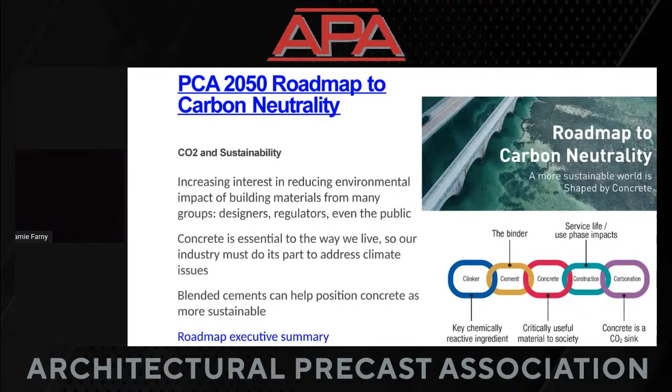We need to move people around. We need to move goods. We need to have protection on our waterfronts. So what can we do within that context of providing this really valuable material to address climate issues? We know blended cements are one way that we can help make concrete more sustainable. So in this roadmap, we looked at clinker, cement, concrete, construction, and carbonation.

We looked at the things that are really critical in terms of that whole manufacturing process, and we called it the 5 Cs. And we said, every one of them kind of has an area where we might be able to pull carbon out. So we broke it up and we were very methodical about looking at everything. And I want to focus on just a couple of them.

And optimizing cement was something that our manufacturers identified as a real key area where we can have a significant impact. So clinker is what we manufacture from these materials that we mine out of the ground, and then we grind that up into the powder that is Portland cement. So what is the appropriate clinker to cement ratio? How much clinker do we really need for cement to be able to do its job?

So we're looking at modified formulations. And one of those we're focusing on quite heavily today is making sure that people understand and at least allow as an alternative Portland limestone cements or PLCs. That's a big focus. It's just building awareness, educating people about its performance and its benefits. We know that there's other cements that will come online over the next really 3 decades, things that we maybe don't even know right now.

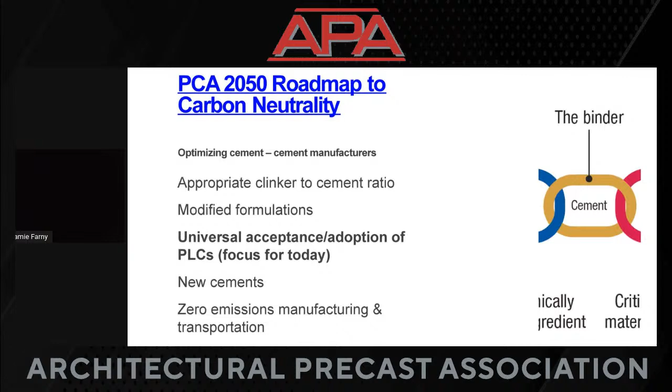And we're also looking at, well, how do we move those materials around? In manufacturing and in transportation, there's opportunities to have fewer emissions. So a big part of it is the focus on cement. But again, as part of this 5 Cs value chain that we speak about, we also recognize we can optimize concrete. Concrete producers have a role. We don't build with cement, we build with concrete. So what can those people in that part of the industry do? They can optimize mix designs, improve mix designs.

We can increase our use of SCMs, supplementary cementitious materials like slag and fly ash and silica fume and other additives. These are often byproducts of another industry. Sometimes they end up in landfills or as waste, but we know they can be beneficially reused in concrete. And in the US, at least, they aren't always given the same environmental footprint that other materials are, so they can help bring down the carbon footprint of concrete.

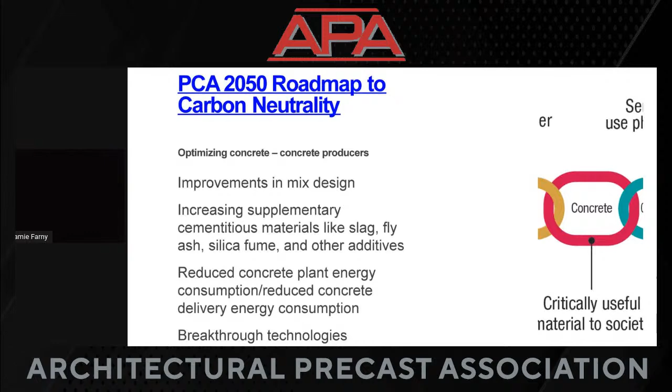We can reduce the energy consumption in our concrete plants and the way that we deliver those materials. There's, again, opportunities to pull carbon out. And we, again, recognize we probably don't even know all the things that are going to come online in the next 30 years. We just know that people will improve processes. People will come up with better, more innovative ideas. We know that right now, though, PLC is one option to lower the carbon content of our binder.

And it is, again, acknowledging the CO2 footprint of construction. We're aware of it. Is it a problem or is it an opportunity? Because when you have a lot of carbon, you maybe have the most knowledge on how to deal with that. PLC is a proven technology. You heard in the introduction, Joe has been part of the task group and the different subcommittees and committees at PCA that have been working on bringing PLC into the standards appropriately. So we know that PLC can help make concrete and masonry products more sustainable. This may appear to be happening very quickly, but the work behind it and the research goes back decades.

So what is PLC? What is Portland limestone cement? We like to say it is a greener cement option. It is a blended cement, and it has additional limestone content in that cement. And then that overall cement is optimized for performance. So right now, at least, it is the easiest way to reduce the carbon footprint of products that are cement-based by up to 10% over the more traditional Portland cement mixtures that you probably are familiar working with.

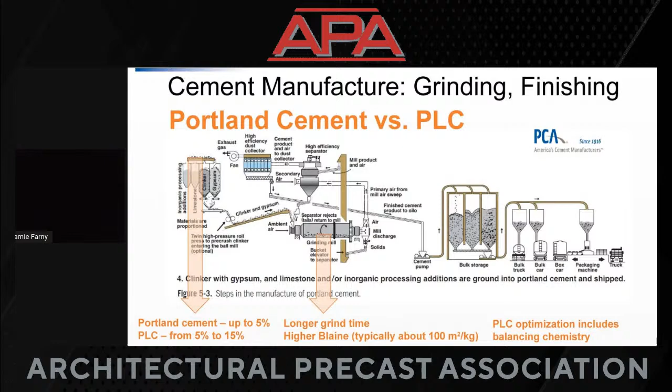So that's one of the ways that we are modifying the cement itself after we add in a little bit more limestone, but we also do some other optimization that includes balancing the chemistry. So we do things a little bit differently at sort of almost the end stage of manufacturing of these cements to make sure that they're going to perform very similarly to that type 1 or 1-2 Portland cement that is the most common material used for concrete right now.

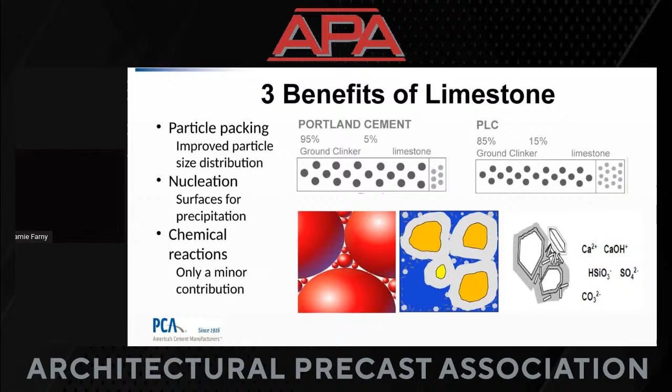So you might have some small chemical reactions, just a minor contribution, but remember there are charges on these particles. So we do see a slight improvement in the chemical reactivity of Portland limestone when we grind it so finely.

So again, the industry has been involved in this activity as a cement manufacturer for decades. We have done a lot of standards work. I said it may feel like this material is all of a sudden kind of appearing out of nowhere. Where's Portland limestone cement coming from? You know, I hear a lot about that now. Well, really, we've been working in the standards to make sure that all the technical information was in place to be able to introduce it.

So we've got that C150 Portland cement standard that's been around for a very long time. It allows up to 5% limestone for almost 20 years here in the US now. Type 1 or a type 1-2 is going to be the most common. So what we're talking about is a material that can perform a lot like that, but it comes under a different standard, the C595 blended cement standard, also from ASTM. It shows you that 5 to 15% limestone limit. So that's spelled out in the standard. Any material that we're manufacturing that's called a PLC or a type 1L has to have in between that range of limestone.

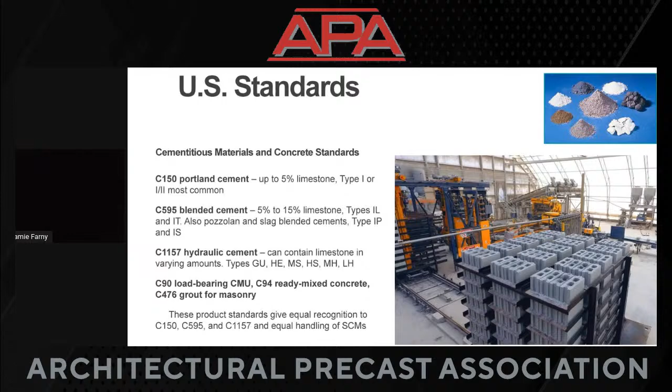Those are the cement standards that are then recognized by the concrete material standards, like C90 for load-bearing concrete masonry units, or C94 for ready-mix concrete, or C476 for grout for masonry. All of those standards recognize any of those 3 cement standards, and they say, hey, we can use all of these materials more or less equally, and we can still use our supplementary cementing materials, or SCMs, along with them. So I've touched on the idea that these are not new materials. They've been around for a while. There's actually a really long track record for limestone containing cements.

Within the US, we have a little bit less familiarity with them until really a decade ago, but there's a very good history of performance, and we're even talking at above that 15% limestone content that we limit it to by our standards in the US right now. Europe has had these kind of materials since the late 1960s. So we're talking about more than 50 years ago.

Canada has been using them since the late 2000s. So they were just a little bit ahead of us in terms of accepting or adopting these kind of materials. But our standards, as I mentioned, have been in place since 2012. And then there were a few manufacturers who already saw the benefits of this kind of movement back in the early 2000s. So under that C1157 standard, that performance cement, they had to demonstrate that it actually achieved strength, and it set, final set and initial set, the same kind of way that we expect the Portland cement to behave.

They already started manufacturing these cements under this other standard. Again, it wasn't widely embraced, but they were out there. We have already then more than 15 years of experience with these kind of cements in the US. What we also know is that our market share for blended cements will grow. We've seen this in other countries as people get familiar using them. And then just a few years ago, we were tracking under 2 million metric tons of Portland blended cements. We're already seeing over 4 million metric tons last year, and we've seen a dramatic increase this year.

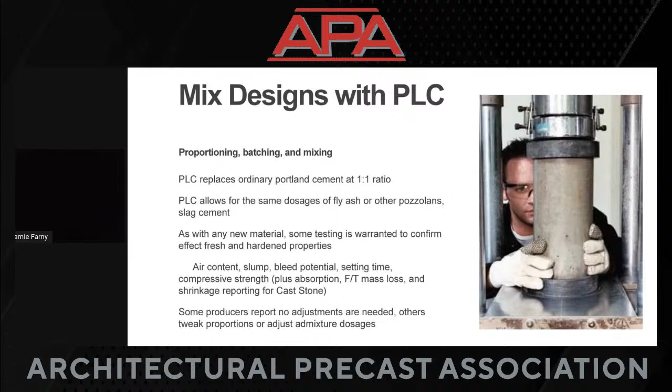And what we hear from many parts of the industry, remember this information that you're seeing today is largely focused at ready mix, but what we're hearing is that some producers report that they really don't make any adjustment once they do that 1-to-1 swap. Others are saying, I may have to bump up my admixture dosage or bump it down. I'm seeing just a little bit of difference in what I get out of my concrete mixes. So I know how to control with admixture technology.

So if we look at the typical effects on the fresh and hardened concrete properties when we put PLC in instead of Portland cement, we look at the fresh properties like workability, bleeding, setting time, heat of hydration. If you're doing very massive things, that can be a consideration. We look at the hardened properties like compressive strength and our scaling or freeze-thaw resistance and our sulfate resistance. So in every case, we can see maybe a slight increase or a slight decrease, but not a big impact on any of these. And the reason, again, is we're talking about very similar cement chemistry. These cements set and harden the same way that a Portland cement does. They are largely Portland cement based.

That little bit of extra fine limestone, and because it's a finer ground cement overall, it may have some slight impacts. Maybe it's going to decrease your overall bleeding. It may delay it, it may decrease it, because again, the mix is very tightly bound with that particle packing going on. The water can't work its way to the surface. You might see a little decrease as your materials get finer, but at the 15% limit that we're talking about, the setting time, that slight decrease that you might see, either initial or final, it's really manageable. And if it is somehow a concern, again, you can turn to tweaking your admixtures a little bit.

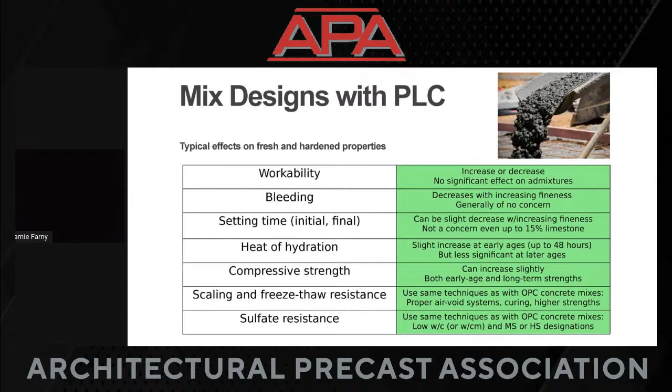But the message for all of those durability issues is that whatever you're doing for your ordinary Portland cement mixes, whether it's a proper air void system through admixtures or good curing or turning to higher strength or using an SCM as part of your mix, whatever you do for your ordinary Portland cement mixes, you do the same thing. You take the same approach with the PLC, and then you test and you confirm, is it a good performance?

So I just talked about sulfate resistance a little bit. You may have, depending on your cement supplier, an option to specify a special type of cement. For instance, for sulfate resistance, we can append an MS or an HS designation to our type 1L. So where we have a type 1, we just put in a type 1L. If we have a moderate sulfate resistance type 2 material that we typically use, talk to your cement supplier. They may supply a type 1L MS.

This material would be tested to demonstrate that it can resist sulfate expansion under exposure to sulfates, and it has to be tested in order to receive this MS designation. Similarly, if you use a type 5, you might have a high sulfate resistant type 1L available to you. In August of last year, the C595 standard was changed to allow producers to produce a type 1L HE, or high early strength material. And this is comparable to type 3 high early strength Portland cement.

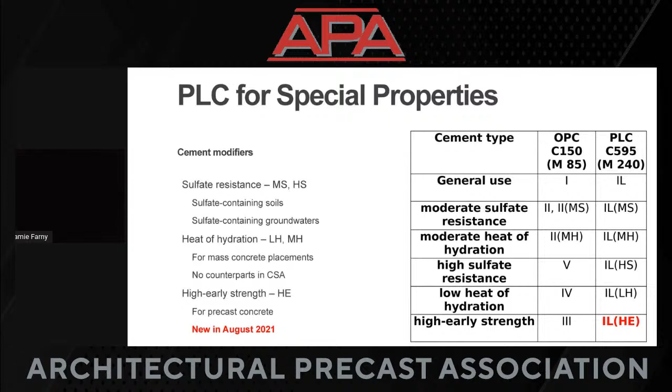So the idea is always talk to your supplier. If you have an option to specify a special property that you require for your particular products, you may be able to get it from your supplier. If those special characteristics are not manufactured by that supplier that you use and another one isn't available, you can use admixtures to achieve those kinds of performances as needed.

So let's talk about, again, this is designed to be drop-in ready. This is a technology, a one-to-one replacement, swap it out, you're good to go. You have the same operations for placing, for finishing, for curing. Now with curing, I will mention, as you see that fineness increase, because these are finely ground cements, you might see a little bit less bleed water. Maybe you can get on your slab sooner. You might see a little bit of a reduction in setting times, because again, that strength is kicking off pretty quick. You might see a little higher water demand.

This is pointing back to that importance of knowing your materials and your mix designs and testing, understanding them. The message here, though, is it's virtually the same handling and performance as ordinary Portland cement concrete. It's designed to be that way. You have the technology that you use with OPC mixes. You can turn to that same kind of approach for a PLC mix.

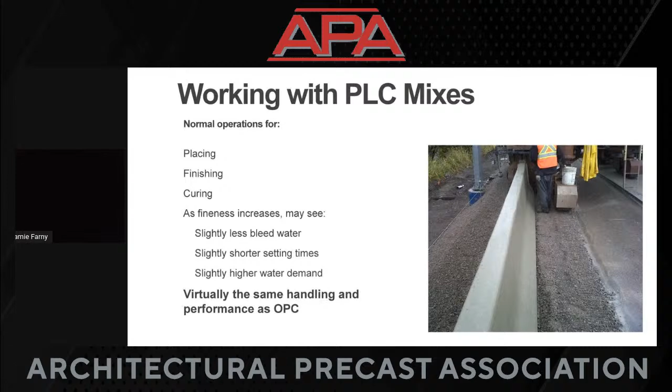And that picture I'm showing at the right is a zero slump barrier wall made with PLC. It's up in Canada. It's been performing really well. So again, we can take these from normal workability kind of mixes down to the very low workability mixes and stiff and extruded, and they can still perform well.

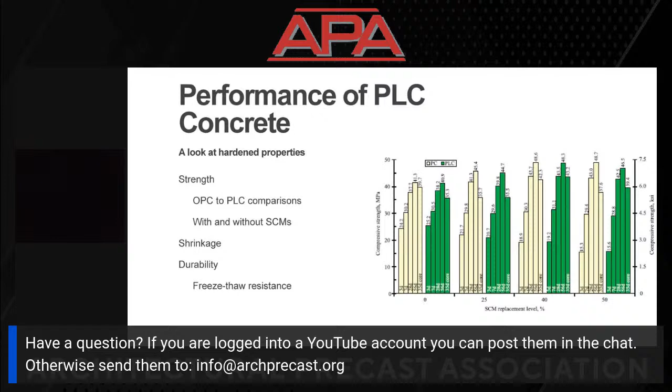We can talk about the performance of PLC concrete, those hardened properties. This figure at the right is a very important figure. It has pairs of graphs that look at the yellow or tan bars versus the green ones, for 0, 25, 40, and 50% SCM replacement levels. So these have no SCMs at the left. These have only 50% PLC or Portland cement with a 50% SCM blend in them.

And we look at the strength from 3 to 7 to 28, 56, all the way out to, we even take a core at a year. And you can see within each set of graphs that the green and the yellow or tan are almost identical overlays of each other.

So this is telling us we get the same ultimate strength with a PLC mix. We also get the same strength development with a PLC mix. So we figured out compressive strength. You can do it with or without supplementary cementing materials. If you need those for either a durability aspect or to bring down your carbon footprint because you have fly ash or slag cement that doesn't have the same CO2 footprint as cement, they work well together. That's the bottom line message there.

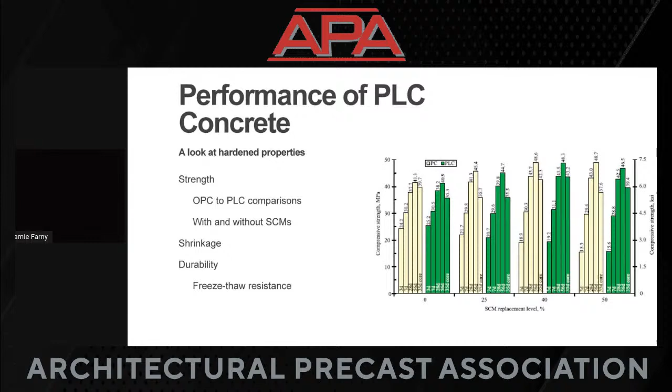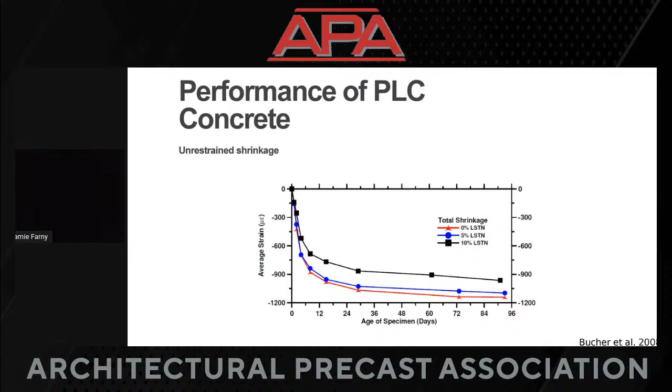So you can see out to this 3 months here that the red or the 0% limestone, so that'd be more like a Portland cement mix, it actually shrinks a little bit more in this particular set of materials than the 10% limestone mixture. So that's telling us that limestone is just reducing our shrinkage a little bit, which maybe helps with cracking just a little bit. Again, understand your materials, study your materials, work with them, know them, but limestone added to cement should not be affecting shrinkage in a bad way. That's the message there.

I can point you towards some information if you want to follow up on freeze-thaw, de-icer scaling resistance, but I am talking about freeze-thaw, where in this set of materials, the blue bars are Portland cement, the yellow are a 12% Portland limestone cement mixture. So 12% limestone in the PLC. So this is a durability factor where we expose this sample to freezing and thawing in water or air, and we cycle it. And you want to get 300 cycles usually.

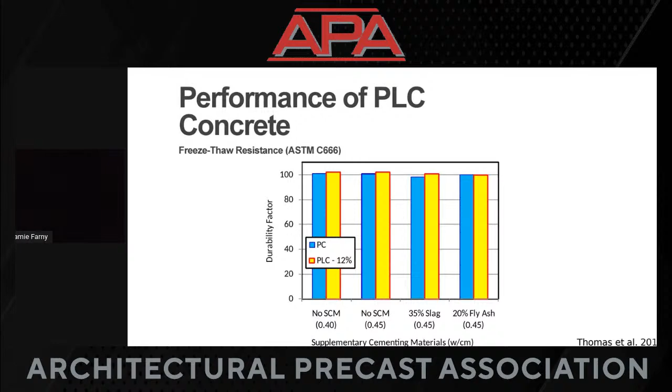We see that even at different water cement ratios, 0.4 and 0.45, with no SCM, you see very good performance. These are durable materials. They can freeze and thaw. They can be exposed to cold weather. They're not falling apart. If we add slag in at 35% or fly ash at 20% to either the Portland cement or the Portland limestone cement mixes, we still get across the board pretty much 100 durability factor. So the message here is these can be freeze-thaw durable materials. You don't have to worry that PLC is somehow going to make you non-durable in a cold climate.

It doesn't happen. We've documented all this performance and more where we look at the fresh and hardened properties like workability and bleeding and setting time. We've got a lot of data pointing back, again, decades. We look at the strength and volume stability, so that shrinkage or cracking aspect of Portland cement versus Portland limestone cement. We look at durability issues, transport properties. Again, how do chlorides, how does water work its way into our concrete mixture?

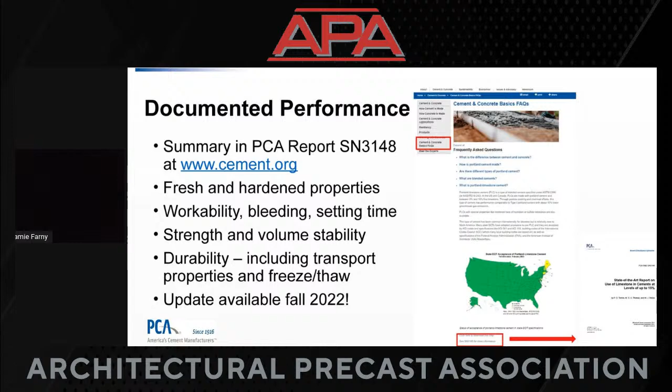So on the cement.org website, we've got a PCA report called serial number 3148. Under our frequently asked questions on cement and concrete, What is Portland limestone cement? You'll see a map of the US and below it, a link to this state-of-the-art report that we have put out. It's 10 years old. We're working on an update. I would caution you, if you do go to read it, that some of the information on sulfate resistance has 10 more years of data behind it now. So we are updating it. The sulfate recommendations in that report are just a little out of date because we know a lot more about them now, and we have a good understanding of sulfate resistance of PLC materials.

So that map that you saw, it's really the DOT, the Departments of Transportation, acceptance of PLC around the country. Many DOTs have studied PLCs because they say, I know there's all this data. I know people have researched it, but I still want to be able to make informed decisions about PLC in my market, with my aggregates, with my mix designs. So I believe what you say, but I still feel more comfortable studying it so I understand how it's going to perform where I am.

So Oregon State did this comprehensive PLC research program for Caltrans, the biggest DOT in the country. And what they found was, again, similar set time, similar shrinkage, similar time to corrosion, similar or improved ASR performance and sulfate resistance, even a little better flexural strength when you mixed it with slag.

But again, very comparable performance. So Caltrans updated its specs in October of 2021. We talked about how do you get these materials? What's the basics of specifying and ordering them? These are called a type 1L cement.

So you revise your specs. You can replace OPC with PLC. It's 1-to-1. If you use 564 pounds of OPC, I'll allow for 564 pounds of PLC. You use the same ready mix suppliers, the same delivery and placing equipment. Again, it's designed to be sort of a drop-in material, ready to go.

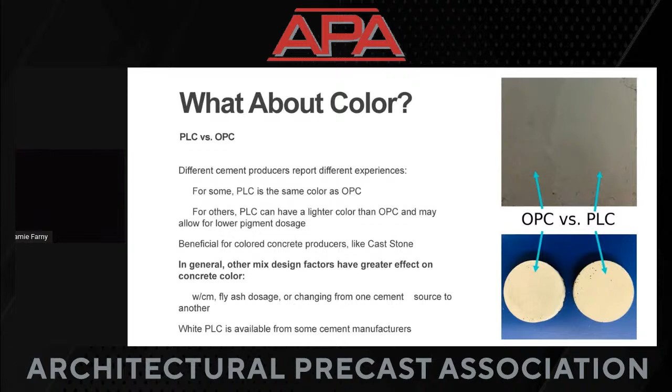In general, we say that the other mix design factors than the cement alone are going to have a greater impact on the color of your product. That's the water-cementitious materials ratio, if you've got fly ash, or if you change from one cement source to another. So really, all of those other things have to be looked at in context, but PLC is potentially going to be a little bit lighter.

And Joe is going to tell you a little bit more about that from a producer's perspective. So I'll turn it over to Joe here. Okay, I wasn't quite ready, but I am ready, and that was perfect, Jamie. I mean, a lot of what you covered.

I am going to do a quick recap and give you more of a cement producer's perspective, and things that Jamie had covered that I'll touch on briefly. Cement in general, color, gray versus white, Blaine fineness, strength, set time. We will talk about the mixture design regarding trials, admixtures, adjustments, and then last but not least, an article I put together on PLC. Next slide, Jamie.

As we look at the cement color and the Blaine, they tend to, in my opinion, coincide together. I'm approaching this more from a white cement supplier point of view, but this will impact, as Jamie mentioned, white or gray. The cement color oftentimes does lighten up a little bit when you're adding limestone to make it a PLC cement. The Blaine tends to increase. That's not always the case. It's going to go plant to plant, but typically when you add that limestone, because it is softer than clinker, in a finish mill, the fineness does tend to increase.

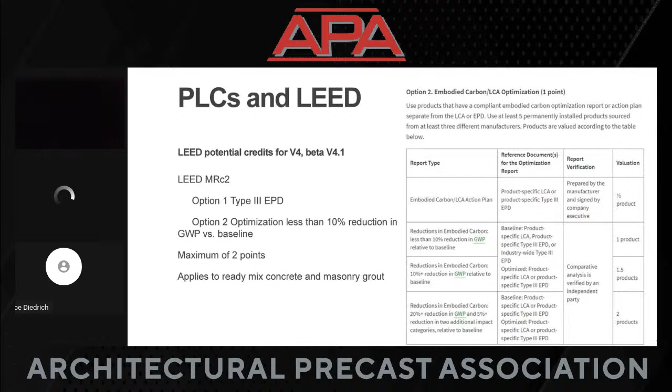Thank you, Joe. I think it is good to have a producer perspective, and like Joe said, they are there. He's a technical representative, a technical assistant. He can help you with issues that you're having. They want to hear from you, and the feedback is always great. So I'll wrap it up here in just a couple more slides.

If you are working with producers or designers that find LEED value, you do have some potential to get a credit for Portland limestone cement use. There's a lot of activity in the environmental product declaration space right now, or the EPDs. A Type III is a product-specific EPD. So that means it comes from this producer. So you may get credit by turning to the producer and asking for that.

And if you can demonstrate that you're reducing your global warming potential versus a baseline design, there's a maximum of up to 2 points that you could get for this, and it applies to ready mix concrete and grout for masonry. So again, there's a potential benefit in using these materials. People want to see movement, they want to see numbers.

We, as part of that effort, created these industry-wide EPDs, or average environmental product declarations for cement producers in North America. We did it our first time in 2016. We revisited that in 2021. These have a 5-year life. They are designed to be looked at periodically to make sure they are representative of materials that are produced.

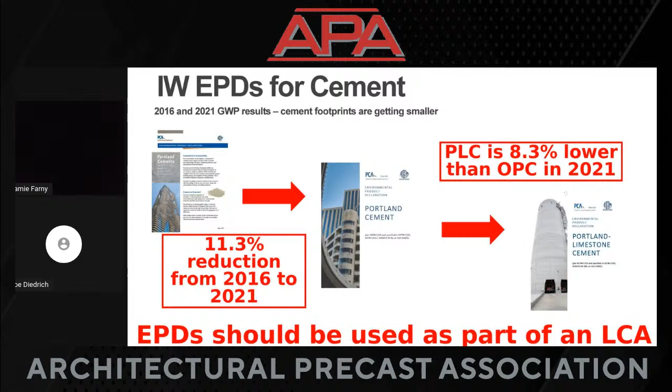Now, I'll caution you, when people talk about EPDs, we're all still learning about them. They should be used as just a piece of data, a piece of information as part of that life cycle assessment. So you don't want to ever focus only on an EPD. You really want to understand what that means for your overall product.

I can also tell you PLC has made an impact already. In that first 6 years that PLCs were available through the standard, we saved over 300,000 metric tons of CO2. We've got these equivalencies from the EPA where that's almost like sequestering carbon in over 400,000 acres of US forest for a year. We also could say that based on all the cement that was used in 2019, if we could have switched all of that over to a Portland limestone cement, we could have saved 8.1 million metric tons.

So these are the things that start to, again, provide context. Why are we doing the roadmap? Everybody's trying to get the carbon out of their products. They're all trying to do their part to address climate change. We're doing our part. PLCs are a pretty easy way to go about doing that, and they can have a significant impact.